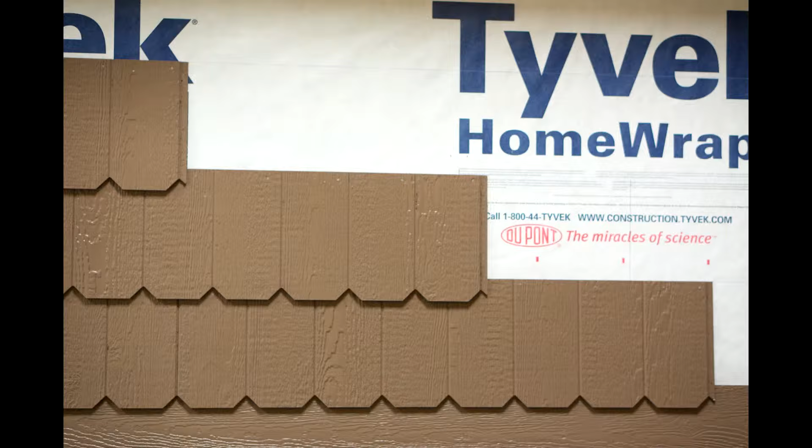For gables, start by dropping a plumb line to find and mark the center of the gable. Next, measure the height of the gable in inches on this line. The purpose of this simple equation is to find out the number of courses or rows. Then divide the height of the gable measurement that was taken. For octagon, divide by 9 5/8 inches.

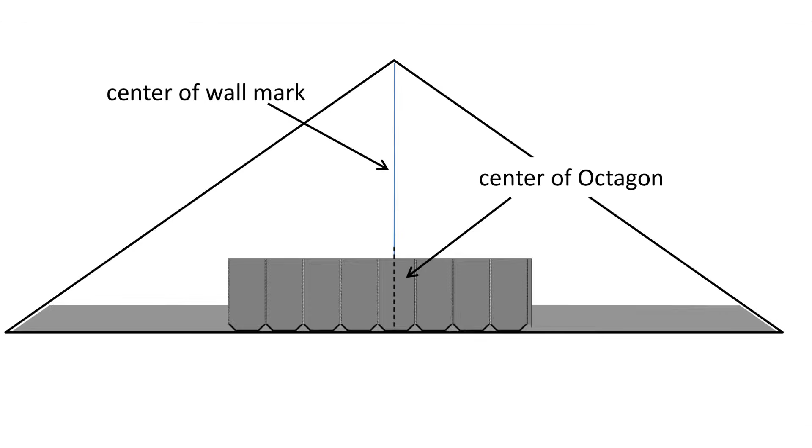If the answer is an even number, center the first course of octagons on a keyway. If the answer is an odd number, center the first course on an octagon. Measure and mark a level chalk line for the top of the panel. For straight walls, measure the length of the wall and find and mark the center.

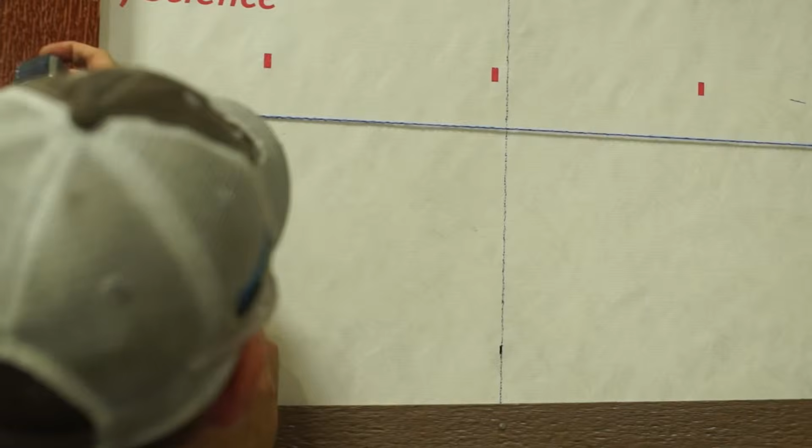Begin installation with a starter strip by ripping a piece of similar colored lap siding or by overlapping a previous course of lap siding a minimum of 2 1/8 inches. Next, install the first panel by aligning with the level chalk line.

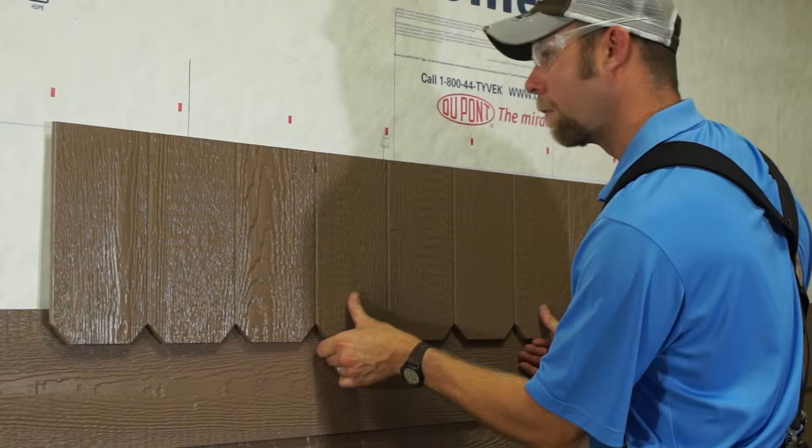Fasten 3/4 of an inch down from the top of the panel into the sheathing and/or framing using a corrosion-resistant ring shank nail. Ring shank nails are required because of the off-stud joining. Fasten every 8 inches on center. Do not place fasteners into the bottoms of the grooves or shiplaps.

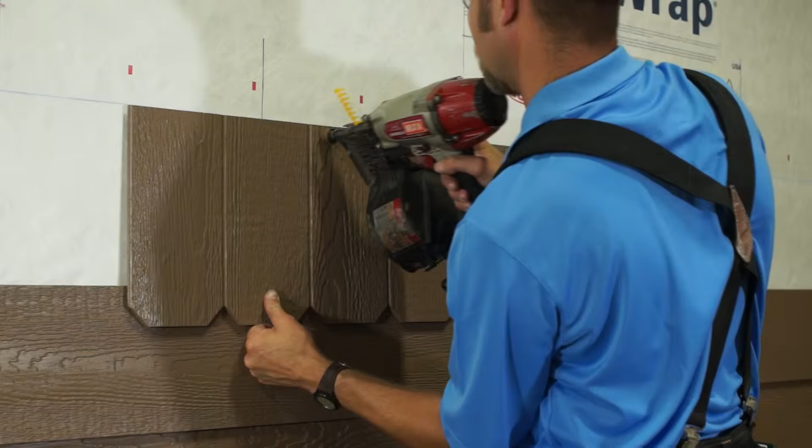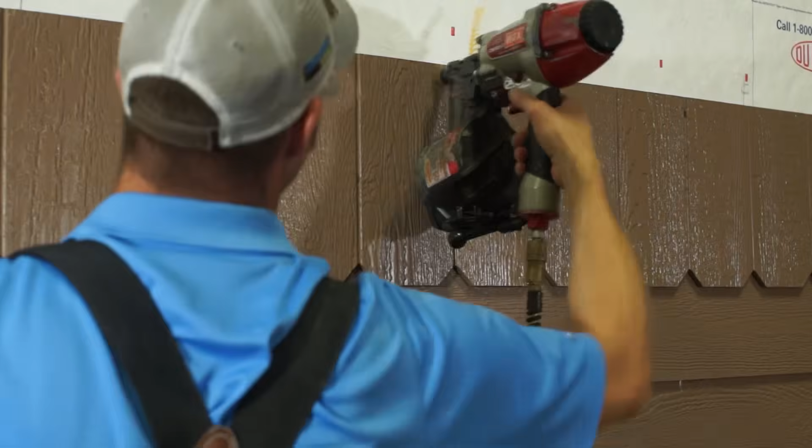Continue to install panels by overlapping shiplap butt ends without any gap. Continue to fasten in the same manner. Finish rows by installing a cut piece, leaving a 3/16 inch gap against the trim or soffit.

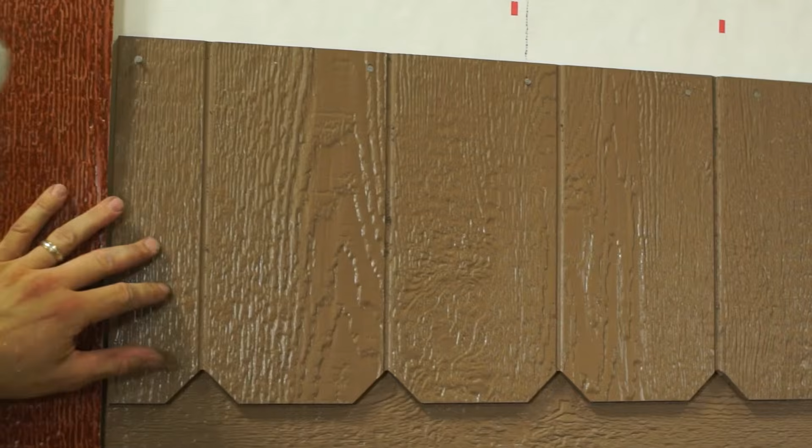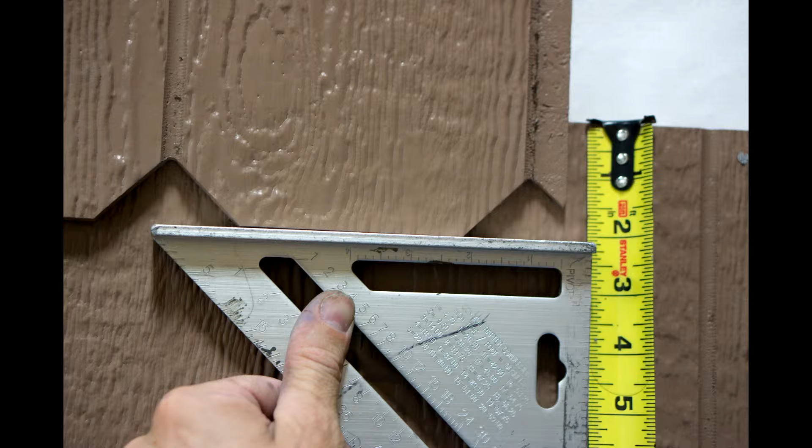Start subsequent courses in the same manner by overlapping courses a minimum of 2 1/8 inches. Continue to measure up 9 5/8 inches and snap chalk lines to get the correct overlap.

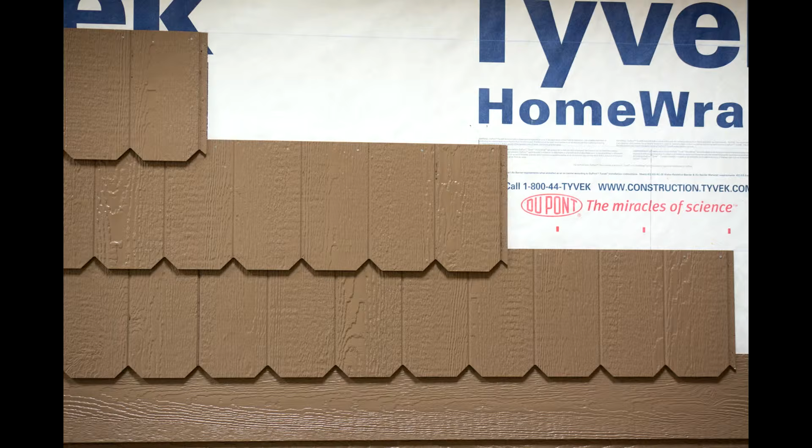Offset each course to effect staggered joints. Best appearance is obtained by installing the second course starter piece 21 inches shorter than the first course. Start the third course starter piece 27 inches shorter than the second course. Repeat this same sequence every 3 courses for the wall or gable. Shim siding at the studs as needed to avoid drawing the siding to uneven walls.